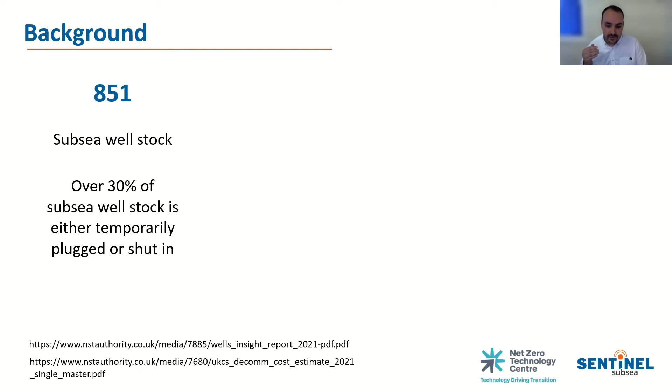Each of those wells, as I said before, has a specific risk profile. The landscape of the mature and aging UKCS poses specific risks around weakened wellheads, valves, and Christmas trees, all of which need to be managed effectively for environmental peace of mind. Also contained within the shelf, we have a number of suspended open water exploration and appraisal wells.

These are wells that have been drilled and are not connected to any infrastructure, are not connected to any surveillance equipment or surveillance systems. Monitoring these wells, monitoring the integrity of these wells, is a highly difficult and quite a hard task to do.

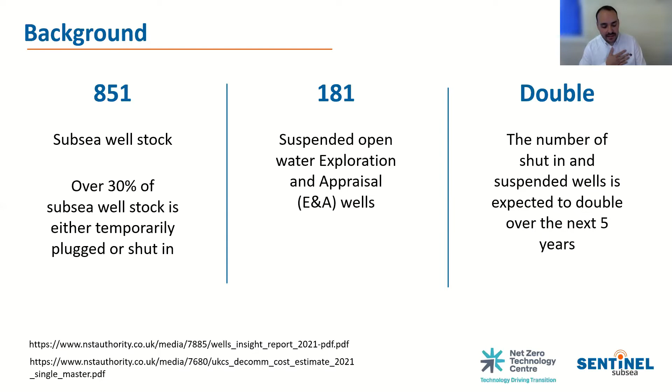Just to give a little bit more background, according to the NSTA, the number of suspended wells is expected to double over the next 5 years. That's really as fields reach the end of their productive life cycle and wells are suspended before a rig or a light well intervention vessel has the opportunity to go and fully abandon those wells. So you can see that the UK really has a large well stock of subsea wells, and it's really important that we manage those subsea wells effectively.

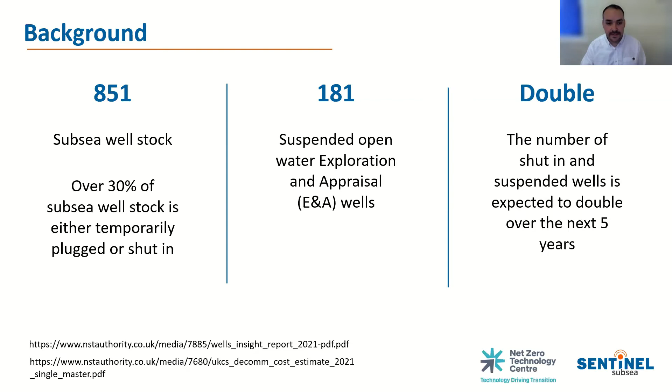Just to give a little bit more on the challenge the industry is facing: if we take those 850 subsea wells and give 20 days of rig time to P&A every single one of these wells, that means that in order for all the wells in the UK to be decommissioned fully, it's going to take 50 years of rig time. Now, that doesn't include traveling to location or mobilization—that is just 50 years of one rig only doing P&A. So you can really see the challenge the industry has here, as multiple wells come up for suspension, and we really need to make sure that the time between COP, or the end of production, and full abandonment, those wells are managed effectively and safely, and also with the environment in mind.

So talking about subsea well monitoring at the moment, as I mentioned earlier, unlike platform wells, going out to a subsea well is a much more involved process. The remote location of subsea wells often means mobilizing a vessel, sailing out to the location and carrying out the work on the well, or inspecting the well, or checking the equipment's condition. And during that time, that is also a snapshot of the integrity and condition of that asset. The only moment you're able to really know what's going on is when the vessel is on location and the ROV is there. So really it's a snapshot of its integrity at that moment in time.

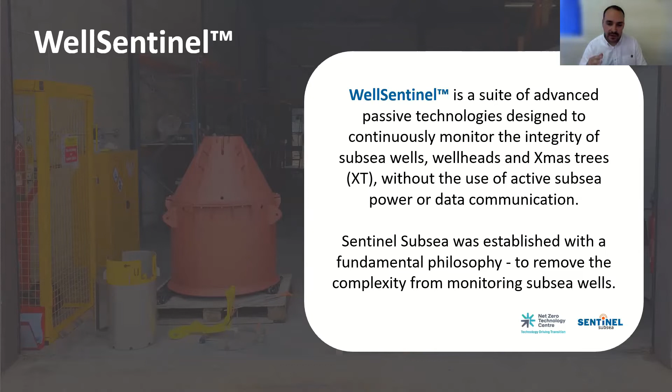So what we have spent the last 4 years here at Sentinel Subsea doing is developing a passive monitoring technology that removes the need for active subsea power and also for the need for data communication. So really what we've done at Sentinel, as a key philosophy for what we do, is to remove the complexity from monitoring subsea assets.

So what is WellSentinel? I think it's easiest to explain it in 3 key and simple steps. The first step we need to do is gather. We have a range of gathering systems designed to direct and capture any fluid that may emanate in the subsea environment. It is then these monitoring and gathering systems that direct that fluid into what we call the monitoring module, and this is where the passive monitoring technology is held—this is the critical part here. You'll see this video I'm about to show you, which is one of our 1,000-litre test tanks that we have here at the Sentinel office.

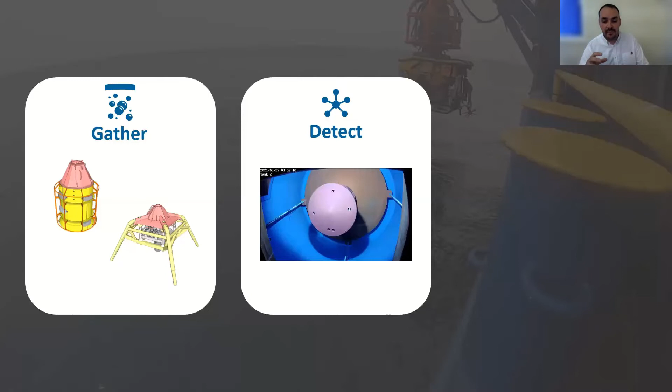We're actually testing the detection of material that may have emanated from the subsea asset, and we're also testing the beacon release. In that monitoring module is an alert beacon. So you'll see there it goes - it's detected a material and launched an alert beacon to surface. That alert beacon is coded to that particular well that we've put it onto. It then communicates via Iridium satellite and alerts the well owner that material has been detected in the subsea environment and that there may be an issue with that well that they need to go and have a look.

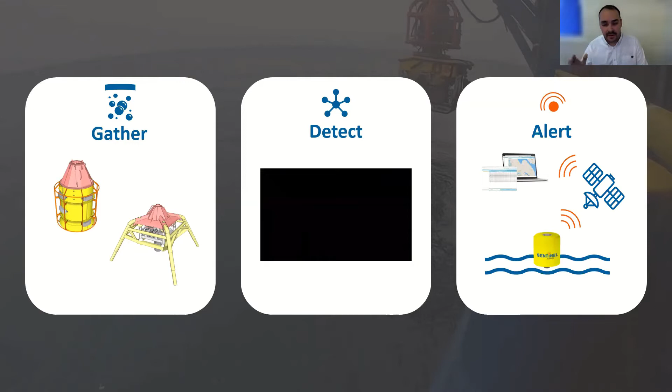So how does it detect? We call them triggers. This is how the system is completely passive - it's essentially materials chemistry. We're talking about a passive monitoring system where a material is degraded that then releases a beacon.

We have a range of materials we've been developing over the last 4 years. The first material is a gas system, which would react to typical gas found in dry gas wells. We've also developed an oil-based trigger which reacts to liquid and fluid hydrocarbons. We have a fluid tracer that can be sealed in the well during suspension, and if that escapes from the well, the system will detect, degrade, and release the alert beacon to surface.

We're also in the process of developing CO2 triggers. A major focus for the industry at the moment is carbon capture, and we're able to develop triggers which assist in monitoring carbon capture sites and assets. We're able to mix triggers, so you may have an oil well with a gas cap, and we can put a gas and an oil trigger in the system. Finally, we're able to custom engineer triggers - we've had a lot of interest around other fluids and materials that we're able to engineer systems for.

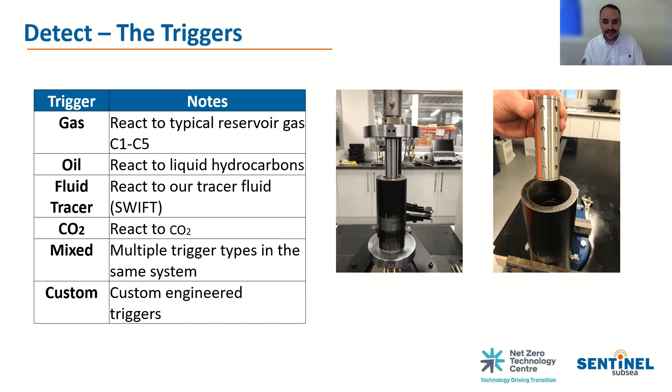Ultimately, all of these triggers, whether gas or oil, only react to the material we want them to react to, and absolutely nothing else it will encounter in the subsea environment. That is the key to the materials chemistry - we have triggers that will react to one material and nothing else. Once it's reacted to that material, it releases the alert beacon to surface, indicating that material has been detected and you may need to have a look.

So I'm going to show you a quick video. This is one of our cowl gathering systems, or WellSentinel cowl systems. It's been installed onto a 30-inch conductor. However, we have the ability to fit any wellhead profile, whether that's 36-inch, 32-inch, 18 3/4, 16 3/4, 13 5/8. So it's a highly flexible system.

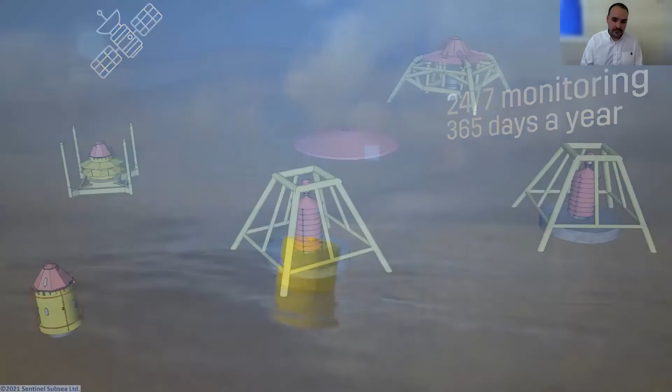Because the passive monitoring equipment is common across any system we create, we're able to fit our systems onto any point in the well's life cycle. You see at the top there, we have a system that fits over a wellhead protection structure, which is very common in the UKCS. Again, all we need to do is capture and direct any escaped fluid into that passive monitoring equipment where it's then detected. Being able to fit onto any asset is really a case of mechanical design, mechanical engineering, and the chemistry that's the core to this solution.

You'll see the two at the front there, those are what we call the FROMs. Those are non-contact gathering systems, used where there's no space on the canopy of the asset. Those work by gathering fluid as it drifts on subsea currents. So our system has an incredible amount of flexibility to fit a variety of subsea wells and monitor those wells for environmental peace of mind.

So we actually deployed one of these systems in June 2021 last year, in collaboration with the NZTC and a North Sea operator. We deployed one of our WellSentinel Coral solutions, the one that you saw earlier, onto a live subsea well in the southern North Sea.

You'll actually see the well there, that's it with all the coral on it. The well had been suspended for over 5 years with a suspension, plugs, a mudline hanger system, and a 30-inch debris cap. The well was at a depth of 30 meters, and the operator had asked for our solution to be deployed as part of a routine visual inspection campaign.

The deployment was to be integrated with the routine IRM campaign, as I said, and we deployed it from the Deep Vision, which is a specialized ROV and survey vessel, designed obviously for going out and inspecting these wells.

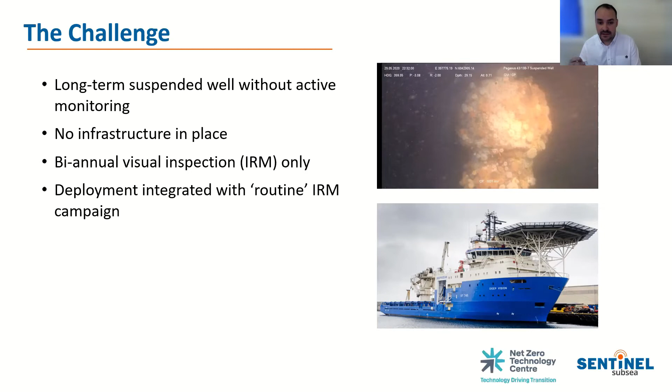So the equipment was successfully deployed onto the well. During the operation, there was actually, surprisingly, evidence of gas at the wellhead. The operation carried on, and the system was successfully deployed onto the well. Subsequently, the system reacted to the gas that was observed at the wellhead, and it operated as designed.

Again, this is an absolutely massive step for us. It really does show the system being proven, deployed from a service vessel, proven and operational in a subsea environment. You can really see the technology and its growth from chemistry into an actual real-life system that we've deployed on a subsea well.

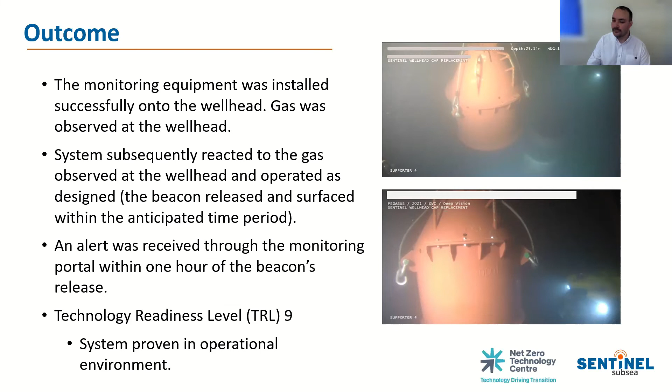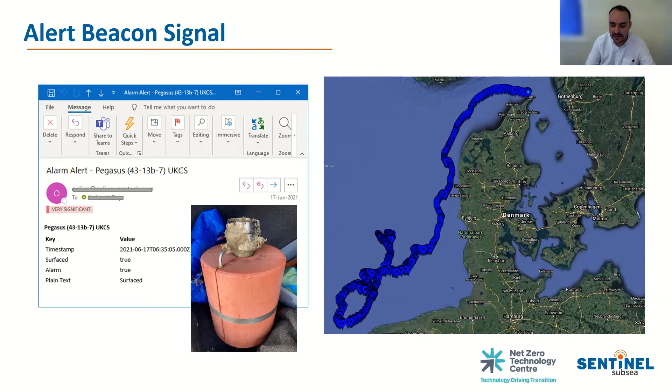So I guess ultimately, what's the environmental benefit of a system like this compared with ROV flybys or other types of systems? Well, ultimately, what we provide is an early alert. We're giving the industry the ability to monitor and react to any subsea integrity issue that may arise.

That tool is able to show stakeholders that the well is being completely monitored for environmental peace of mind, and should anything happen, the operator can react and mitigate any environmental issues.

And also, by lowering the risk profile of that well, rather than needing to go out with ROVs frequently, we're able to take some of those vessel time away, and we're able to reduce the frequency and the need for ROV flybys.

We recently did a validation report through the impact forecast, and this was actually for wells in the UKCS, and it showed that one WellSentinel system deployed on a well is able to save over a 10-year period over 400 tons of CO2, which in the report it gives as the mass of 80 elephants, which I think is really cool.